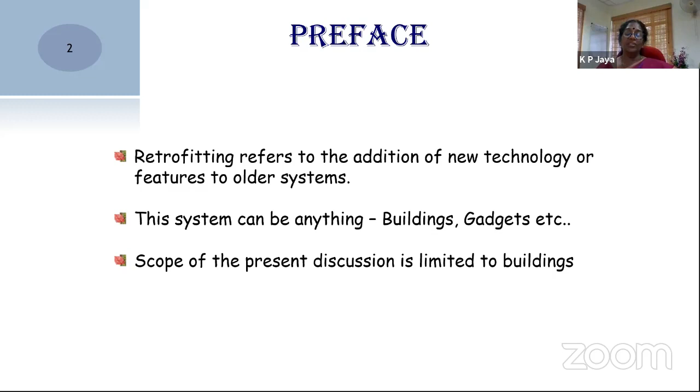Like what we are experiencing now, the corona effect. As they say, any time will pass by, so this also will pass by. We will look forward with a positive attitude.

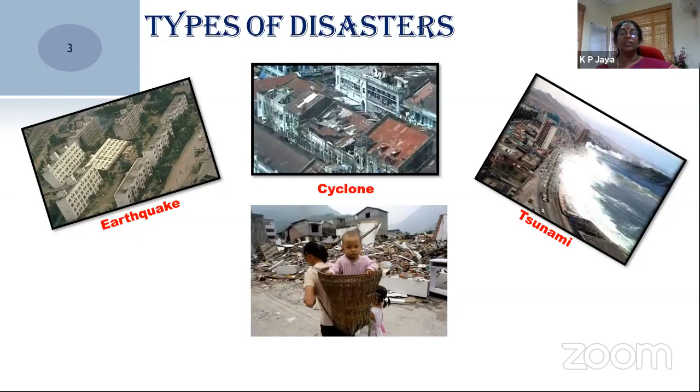This is the effect of earthquake. What is the after effect of earthquake? We will be left with damaged structures and some debris, as seen in the last slide. What are the general lessons learned from past disasters?

I'm focusing on earthquake, which is my focus area. You can look into these pictures. This is a very old picture taken from our Bhuj earthquake, which happened in 2001. That is the heaviest or most damaging earthquake we have experienced.

This is what is called the soft story effect. You can see there was one floor here - an open ground story having less stiffness, which led to the failure of this particular structure by being a soft story. This is a ground floor that is sitting on the ground - the basic fundamental philosophy of damage in structures with less stiffness at the ground story. It will act as an inverted pendulum, where the columns are unable to withstand the load coming from the top. So this is one type of damage.

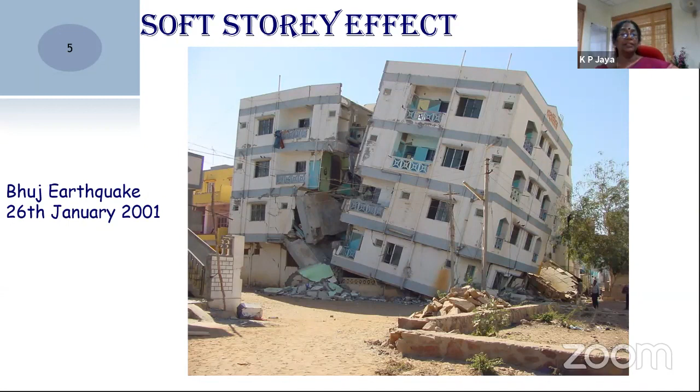This picture is taken from the 2001 Bhuj earthquake. Until that earthquake, we Indians were least bothered about designing structures for lateral loading. After that, people started thinking a lot, and they came out with proper solutions for building structures as earthquake resistant. Now look at the second figure.

This is again the soft story effect. You can see here the discontinuity of shear wall - this shear wall has been curtailed at the roof of the ground floor, and this is the transition girder. The shear wall is resting on the transition girder, and in turn the transition girder has been supported on the column.

So what is the end of this philosophy? The combined stiffness offered by these two columns is lesser than the stiffness offered by the shear walls. Hence the columns are getting damaged. You can see here the concrete has spalled off and the reinforcement is exposed. Finally, the structure has failed. If the column fails, once and for all, the structure will get failed.

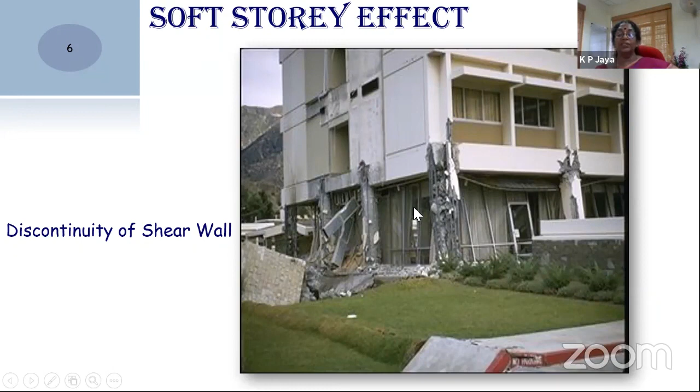This is also one type of soft story failure. You can see here irregularity in stiffness - this is a short column effect, generally called a soft story. What is happening here: this is a one-story column.

Unfortunately, somebody has filled in half the height of the column with infilled brick masonry. So this laterally unsupported column becomes a short column, and the shear forces coming at the top and bottom of this short column become enormously high, leading to its failure. So this is a soft story, which is a subsequent effect of the short column effect.

Finally, what happens after all these disasters is that the column gets failed. This is the top of the column and this is the bottom of the column. The reason for this column failure is generally the accumulation of shear, as well as bending cracks developed at the top and bottom of the columns.

Here you can see the vertical longitudinal reinforcement has buckled and the stirrups have opened up. We have to go about with the total supporting system of the column supports, like confining of column reinforcement and concrete, and all those strategies have to be developed.

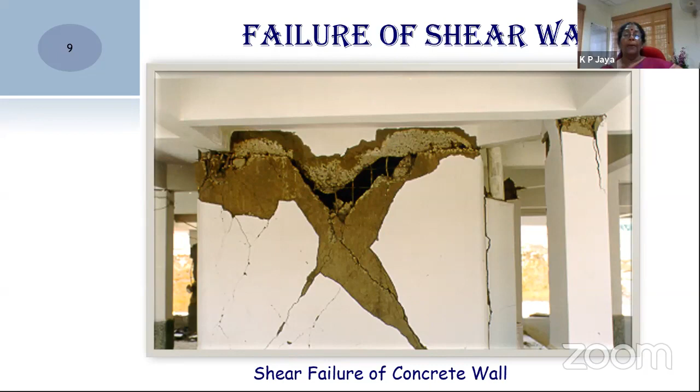Next slides tell you about what is the pounding effect. Pounding means hitting each other. This happens only because the seismic gap between structures is very limited. So there is a particular clause in IS 1893 that we have to provide sufficient seismic gap between buildings to accommodate the deflection during lateral loading.

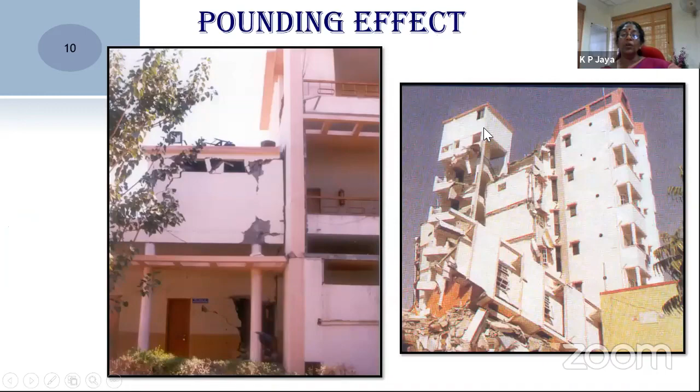Here this picture shows the effect of improper connection between structural elements. You can see here, this is nothing but a shear core, which is the lift core in the building. The lift core supported the diaphragm. At the end of the earthquake, all the supporting elements, diaphragms supported by the shear wall, have fallen down, and only, like our spinal cord, the shear core or shear wall is standing.

So what is the reason for it? The improper connection between the shear wall and the diaphragm which gets connected with the shear wall. This picture introduced some fire into my mind, which led me to give this as a research topic to one of my research scholars, and she has come out with a very proper detailing between the shear wall and diaphragm.

Okay, next is the improper connection between precast structures. You can see here, this is the precast plank, this is the precast beam, and here you can see the precast column, and on this side and this side, the precast wall panel also. During the earthquake, what will happen? This column may deflect towards this side, and this column may deflect towards that side, which leads to opening up of the top surface of the structural elements.

So these planks will lose the supporting base from this portion and will fall down. Just look at the structural elements, the precast elements - all elements are very strong and intact without any failure. But what has failed? The connection has failed. At the end of the day, the structure has failed. So we need to give proper connection detailing between precast structures too.

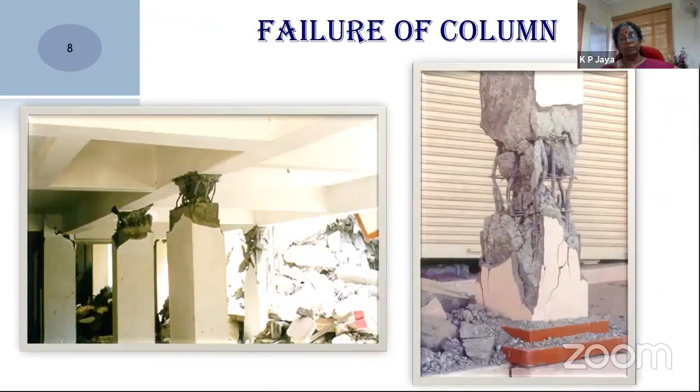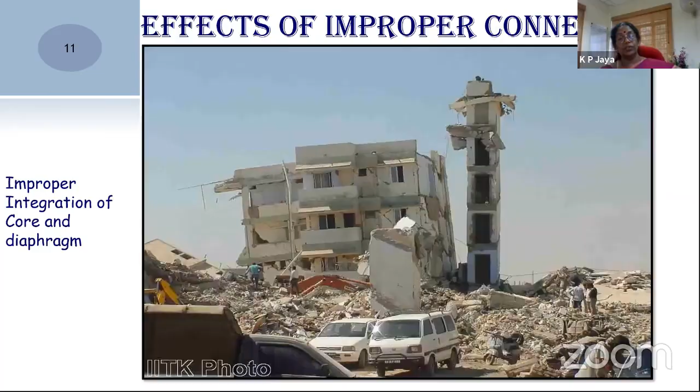So what is the remedial measure? I have discussed the failure patterns during disaster, especially lateral loading, either earthquake or wind. And these are the different types of failure which will be experienced by the system. And what are the remedial measures to arrest or avoid such failures?

For existing structures, we can go with retrofitting. If the structure is experiencing a very limited level of damage, which is serviceable even after the earthquake, we can go with retrofitting. In case of new construction, we can go with three types of strategies: proper detailing, proper planning, and selection of appropriate materials.

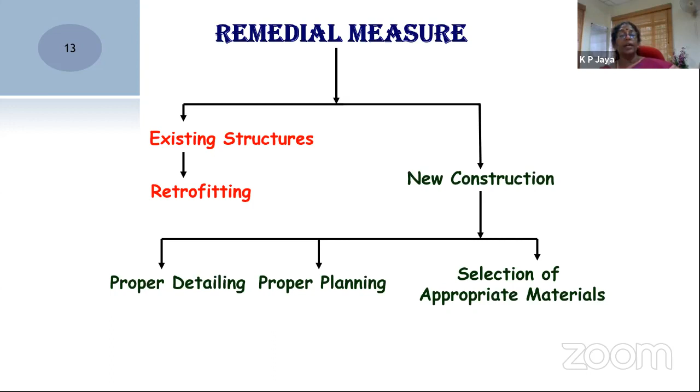So today's lecture is focusing on this part - how we can avoid failure, or handle failure of structures experiencing a very limited level of damage which can be retrofitted back and put into use after the earthquake.

So, phases of the retrofit program. These slides show what phases have to be accommodated in retrofitting. The first thing is vulnerability evaluation - meaning what is the level of damage possibility for a structure. This can be evaluated by considering the structural vulnerabilities of the overall system, the seismic hazard prescribed for that particular site, and socio-economic consequences. These three items will decide the vulnerability of that particular structure in the area under consideration.

Now look into this - the next step is the evaluation of the existing system. System means system capacity. We have to evaluate what is the overall capacity of the global system and what is the demand, the seismic demand.

If an earthquake happens after 10 years, what will be the force exerted on the structure which is retrofitted? That is the seismic demand. There should be a proper ratio between demand and capacity—demand should be much lesser than capacity. That ratio matters a very high importance in the system selection and design of retrofit measures.

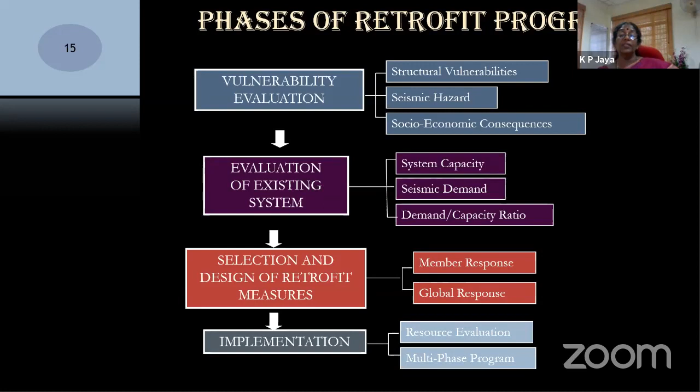This is the overall phase of the retrofitting program. First is vulnerability evaluation, evaluation of the existing system, and define the demand capacity ratio. Based on the demand capacity, we should choose the design retrofitting measures to adopt, and choose the appropriate executing agency.

First is seismic vulnerability evaluation. We should evaluate the site-specific hazard, based on local soil condition and soil response and failure. You can see here, this is the source and this is the path—this is very much concerned with local soil conditions.

If the soil has the nature of enhancing the tremors developed at the focus area, the excitation reaching the base of the structure will be high. The soil property can either amplify or attenuate the effect of the earthquake transmitted to the soil and hitting the structure. So local soil conditions have an important role in deciding the excitation experienced by the building, as well as soil response and failure.

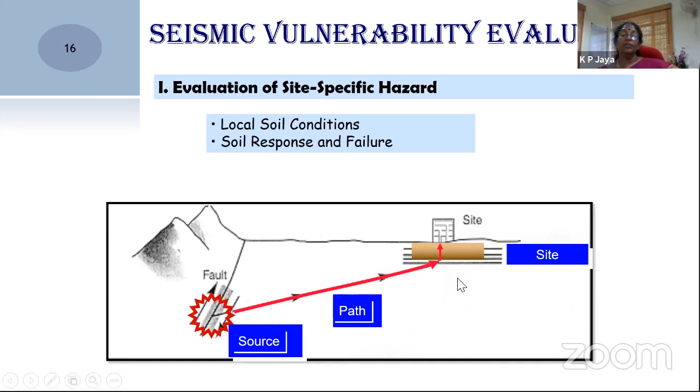If it is a very hilly area, the soil can experience sliding—so there are a lot of issues. Due to soil conditions, structures can experience this type of bulging of soil, leading to failure of the structure. This is the evaluation of site-specific hazard—soil condition plays a very important role in developing these types of damages to the structure.

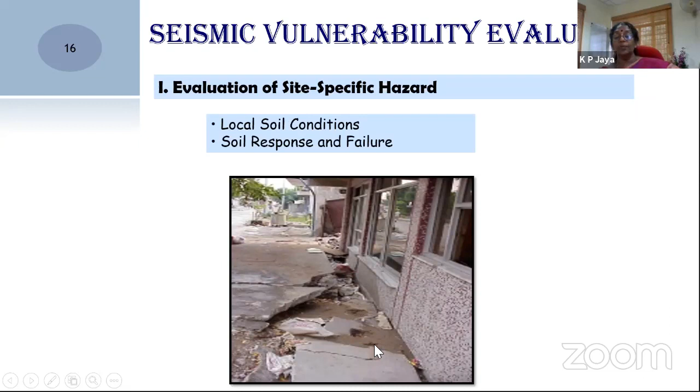Now come to the evaluation of structural vulnerability. We should evaluate what is the capacity and what will be the demand on the structure. Based on that, we have to identify the appropriate geometry—it has to be symmetrical in plan as well as verticality.

When evaluating structural stability or vulnerability, the date of design and construction is very important. The residual strength of the structure has to be evaluated to arrive at the demand capacity ratio. This is the global vulnerability evaluation strategy.

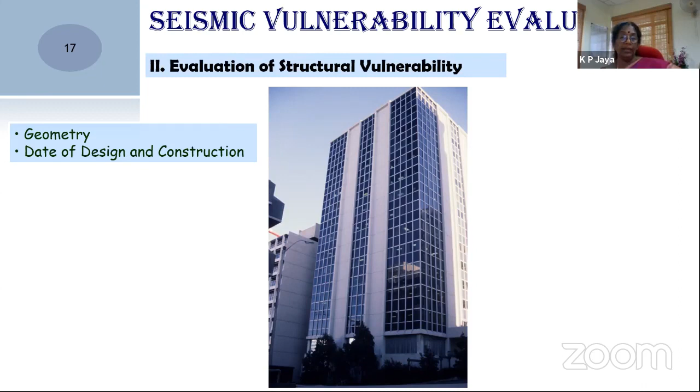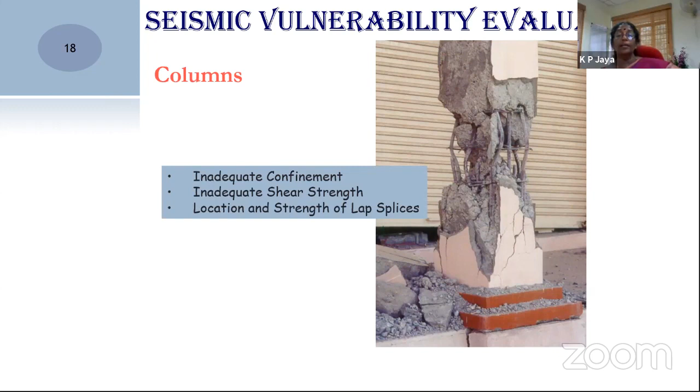When you come to the local or elemental level, what are the vulnerability evaluations? We have to concentrate on elements like columns and beams. First, this column—just look at this picture. This damage is due to inadequate confinement, inadequate shear strength, and location and strength of lap splices. These are the reasons for the failure of this particular column.

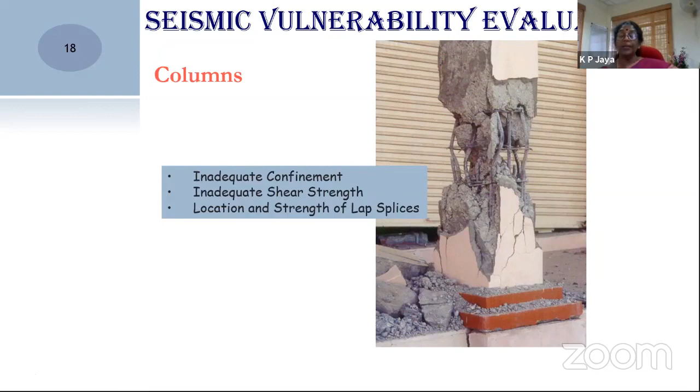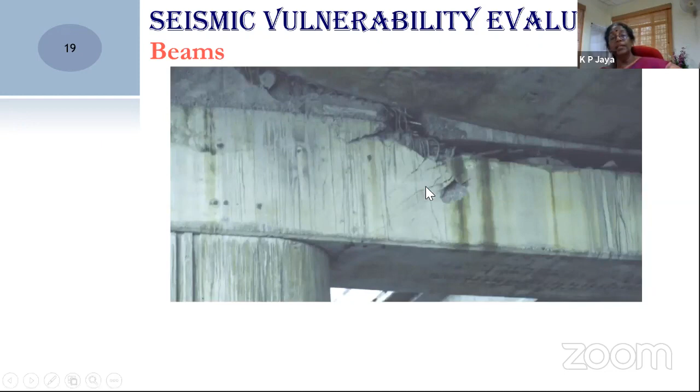To avoid this type of failure, we have to adopt appropriate strategies while doing the retrofitting. Next comes the beam—just look at this failed beam. It has failed at the top surfaces, and you can see shear cracks in the beam surfaces.

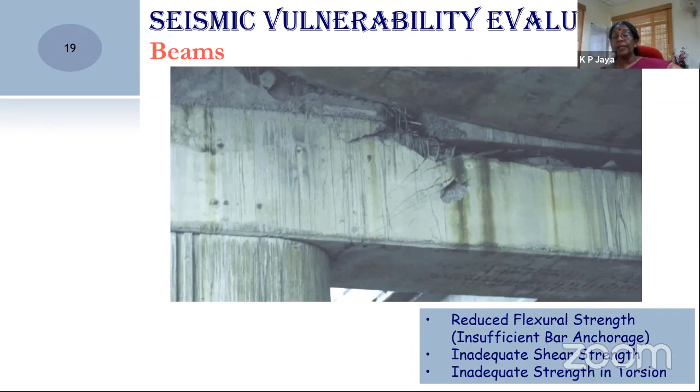This may be due to reduced flexural strength, insufficient bar anchorage, or inadequate shear strength, leading to the development of shear cracks, plus inadequate strength in torsion—it is subjected to torsional warping also. So flexural, shear, and torsion together caused the failure of this beam, and we have to identify proper retrofitting strategy to regain its strength.

Then look at the joints—joints are very critical, crucial locations. This is the beam-column joint, with the column and the beam. Due to shear crack development at the joint region, the joint has experienced spalling of concrete.

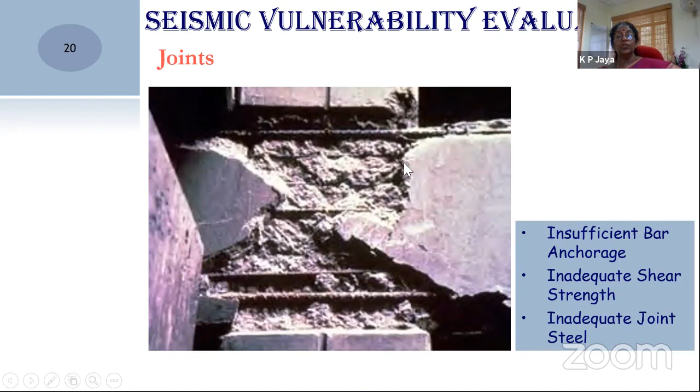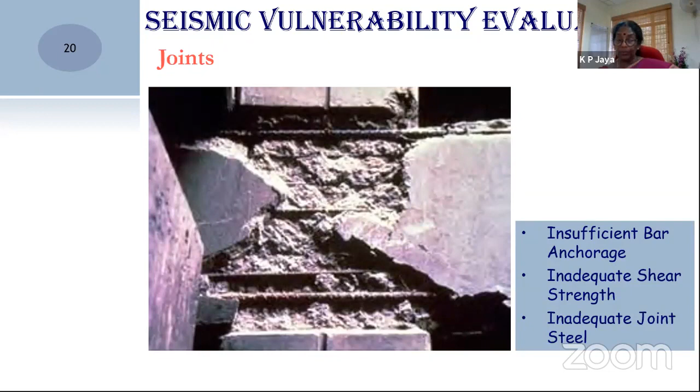The shear reinforcement has been exposed, and there is a possibility for retrofitting this particular joint. The question is what is the reason for failure of this joint region. When retrofitting the joint, we should look at the reasons for failure, and attack them from the root cause before doing the retrofitting.

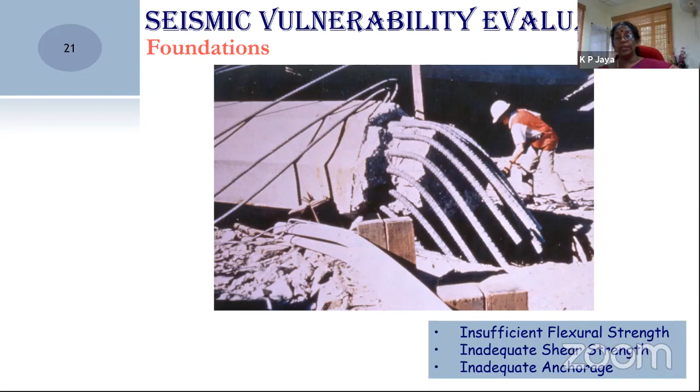Now comes the foundation. Look at this, the reinforcement has been totally taken off. There is no proper anchorage or bond contact between the reinforcement and the foundation. It's totally toppled off. This type of failure is due to insufficient flexural strength, inadequate shear strength, and inadequate anchorage. These failures lead to the strategy of how we can find a proper approach to retrofit the system.

You have columns with dimensions 300 by 300 or similar. We replace some part of the concrete and add new concrete of higher strength. That is what is called replacement of concrete members. Or sometimes we replace a column with a shear wall - that also comes under this category.

Next is addition of concrete sections. We can do either an overlaying method or jacketing. In construction, we generally call this RC jacketing, steel jacketing, or FRP jacketing, depending on whatever material is used. Accordingly, we name the method of retrofitting.

The addition of members - vertical girder addition method. If you feel a particular floor has lesser stiffness, we can add additional columns. That is the vertical girder addition method.

If you need to add support points - in case a beam's span is too high, you can add a column in between. But accordingly, we have to do some retrofitting or reinforcement detailing into the beam where you are adding the supporting points. That is what is called the support method.

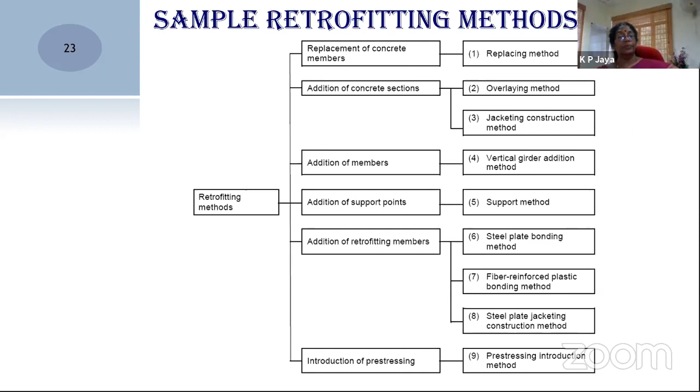So how can we approach the retrofitting method? There are two basic strategies - global method and local method. Global has two main categories: conventional method and non-conventional method.

The conventional method, as I told you in the previous slide, involves adding additional shear wall or additional infill. These will add additional stiffness to the floor. This additional infill methodology has been adopted in some buildings in the Bhuj area after the earthquake, and imparting additional infill enhances the stiffness in that particular floor.

Adding bracing also imparts additional stiffness to the system, and sometimes this bracing can act like a damping system, giving us something capable of dissipating the energy hitting the structure. And adding wing walls will also give additional stiffness to the system.

Wall thickening and mass reduction is a very innovative method. Mass reduction means we reduce the mass overlaid on top of the vertical elements, thereby safeguarding the system. This is because external force - either wind loading or earthquake loading - is directly proportional to mass and acceleration. If we reduce the mass, we in turn reduce the force on the system.

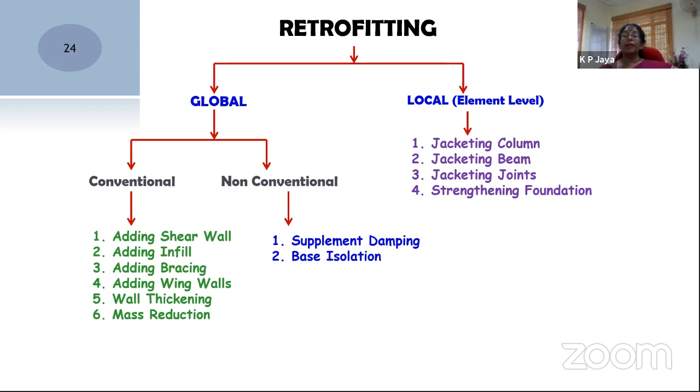Local or element level retrofitting strategy can be adopted, like jacketing column, jacketing beam, jacketing joints, and strengthening the foundations. This is the difference between the global and the local system. In the global system, we are attacking the overall system, enhancing the performance of the overall system. In local retrofitting, we are enhancing the performance of the individual elements.

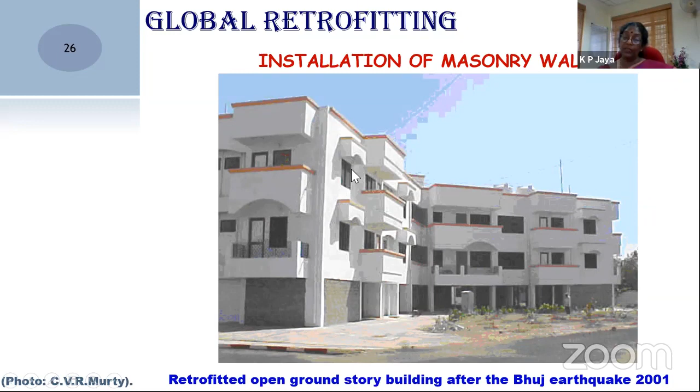I have taken this courtesy of Professor C.V.R. Murty, who is a pioneer in the area of earthquake engineering. These are the strategies suggested by the earthquake community to enhance the strength of structures with the introduction of shear walls.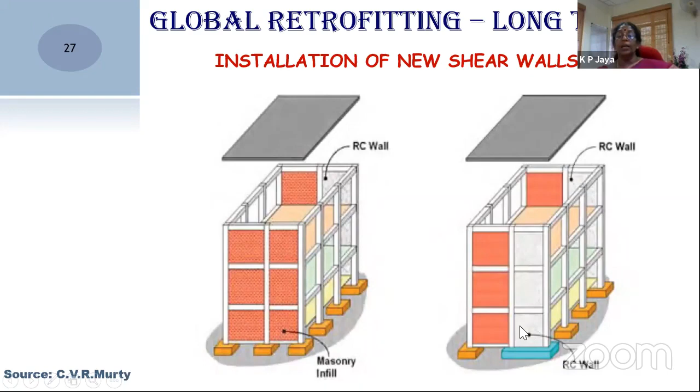Now, while introducing the shear wall, this has to be properly stitched. This is the boundary element, which would have been a column at the extreme end. As seen in the previous slide, one column is here, another column is here. The reinforcements from the shear walls need to be stitched with these columns on either side as well as the beam on top, as shown in this slide.

You can see here, this is a new shear wall, this is the existing frame with a beam and a column. This introduced shear wall has to be linked with the existing element through dowels, which have to be passed through the beams. For that, we need to drill holes through the beam without disturbing the existing longitudinal reinforcement of the beams. These are the dowel bars introduced to connect the existing frame to the newly introduced shear wall.

This is very, very important. Dowels through the existing structure, whether through the columns or through the beams, have to be extended full-fledged. This is the earlier frame, into which these beams have to be drilled to introduce the shear wall. In addition to all these things, the shear wall will have its own reinforcement.

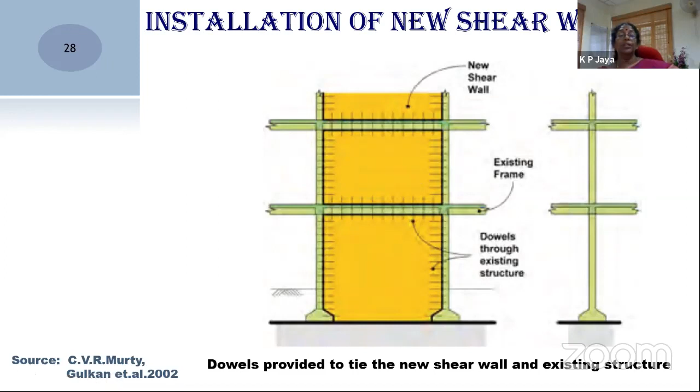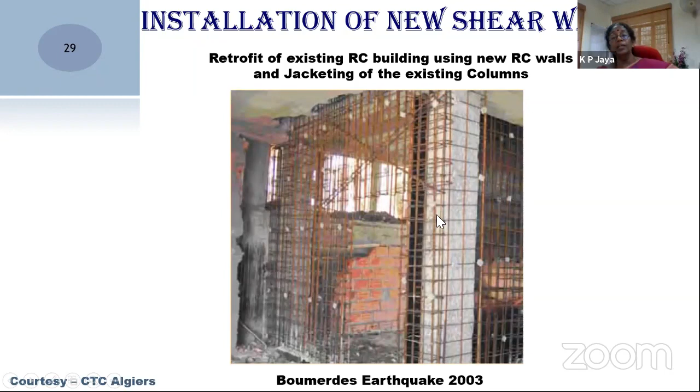You can see here the reinforcement passing through these beams as well as the slabs. The shear wall reinforcement has been drilled through the slab area and protruded outwards. And in the intermediate area, this beam area will be introduced with additional shear dowel bars.

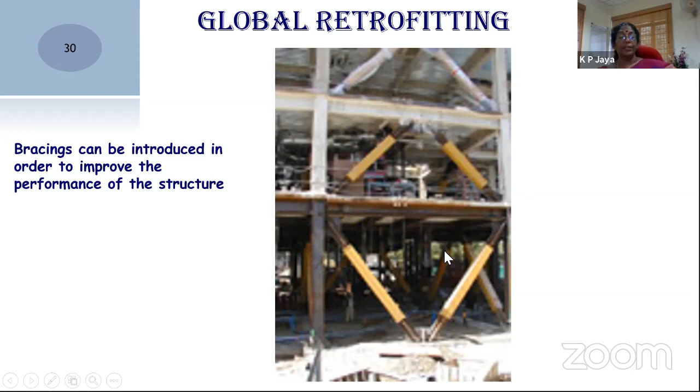This is very much available in the market. You bring it and properly connect it with the vertical element and the horizontal element. Proper anchorage has to be provided. There are different types of braces - you can see here, this is concentric braces, and another is eccentric braces, K braces. These are varieties of braces we will be able to introduce into the system.

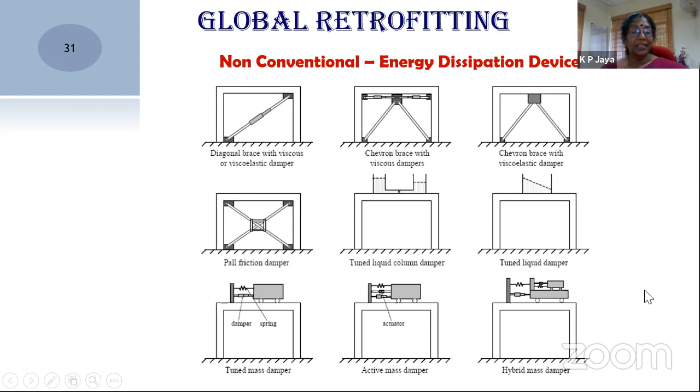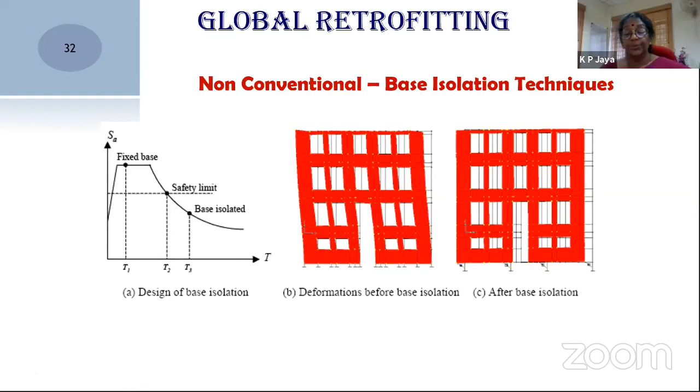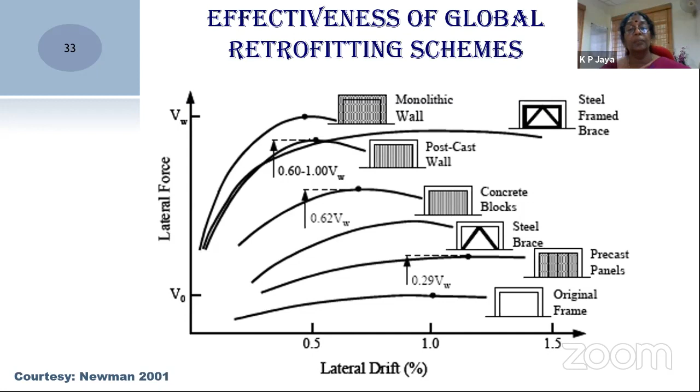Hema, are you there? Ma'am, I'm here, ma'am. Okay, so how much more time will you give me? Ma'am, you can take another 20 minutes, ma'am. Okay, fine. It's audible now, Hema? Yes, ma'am, it's audible, ma'am. Definitely, it is quite difficult to take without seeing the audience.

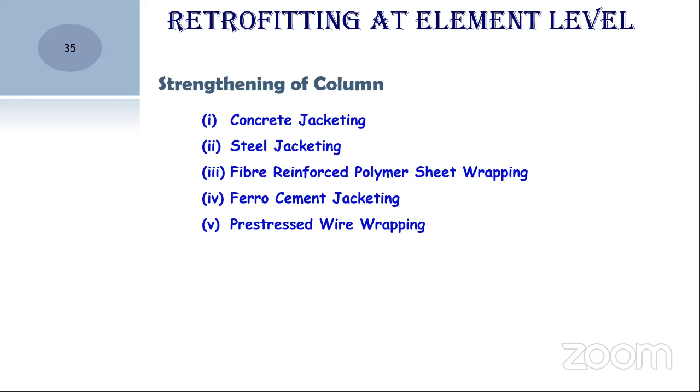Okay, so strengthening of column either by concrete jacketing or steel jacketing, fiber reinforced polymer sheet wrapping - nothing but FRP wrapping, and ferrocement jacketing, pre-stressed wire wrapping. These are the various methods adopted for strengthening the columns.

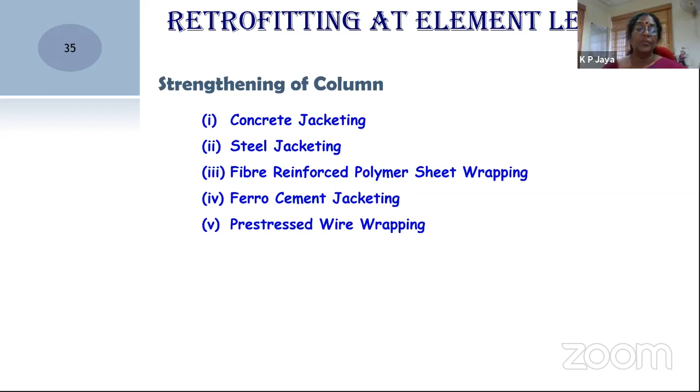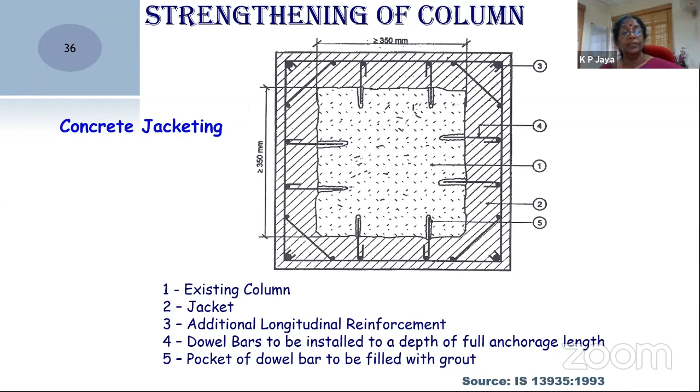Here we have to think about this actual picture where the retrofitting strategy is shown. This is the existing column, and this is the jacketed concrete. Here there are a few precautions we have to take.

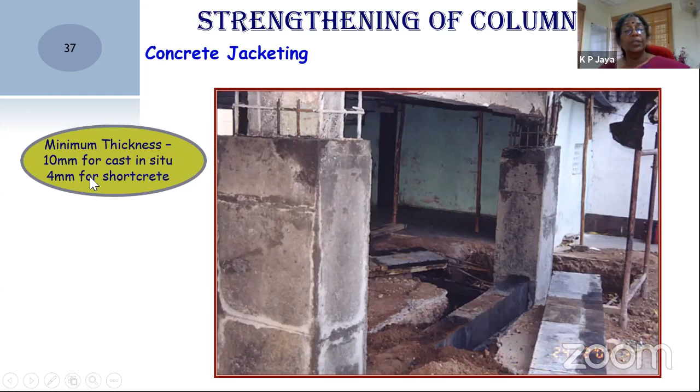Minimum thickness should be 10 mm for cast-in-situ concrete and 4 mm for shotcrete concrete. And adequate shear keys have to be provided to introduce proper integrity and compatibility between the existing column and the jacketed concrete.

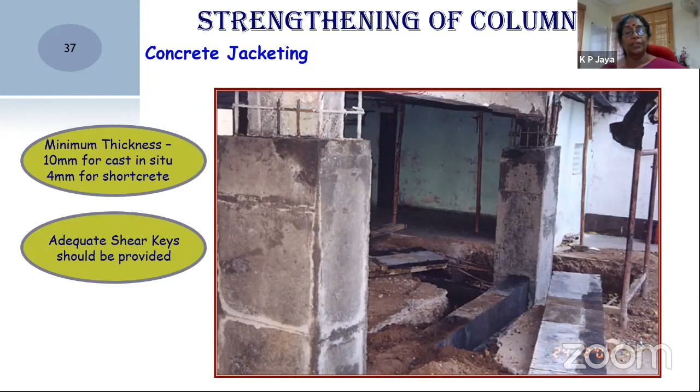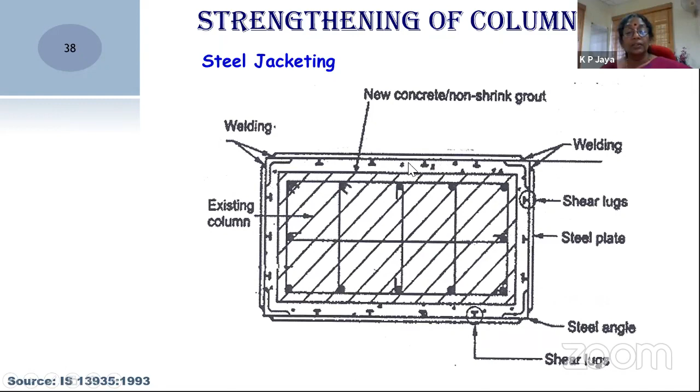This is nothing but steel jacketing - similar to the previous one. This is the existing column, and we can introduce jacketing with steel sheets, which has to be connected. Here you can see the steel angle, which is imparted to the concrete area, and these are the shear lugs connecting the concrete and the connecting element with the existing column.

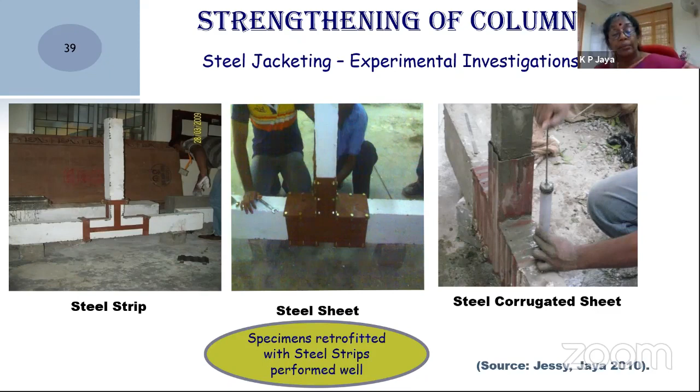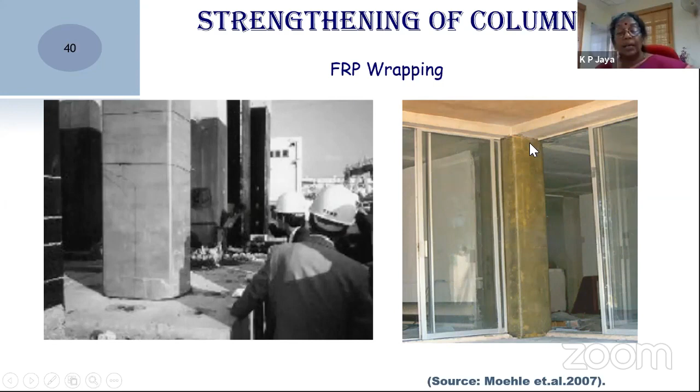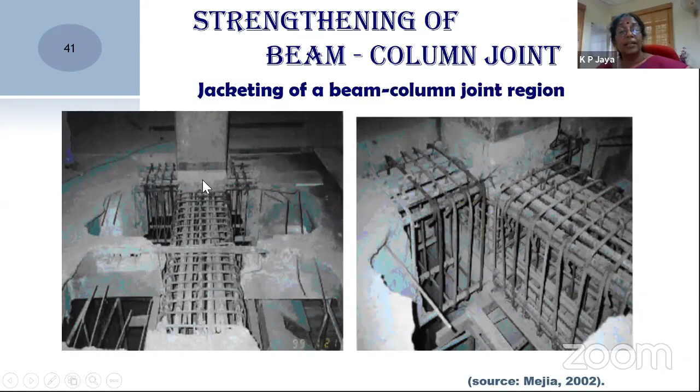This is jacketing of the beam-column joint, RC jacketing. The beam-column joint is exposed, additional wrapping reinforcement has been provided, and later it has been concreted.

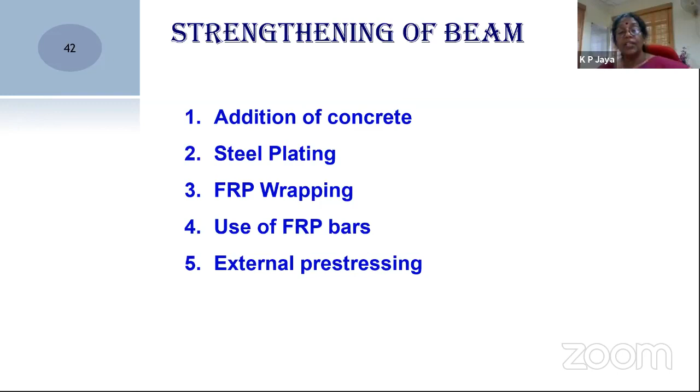Now come to strengthening of the beams - again addition of concrete, steel plating, FRP and FRP bars. These FRP bars can be introduced externally and concreted with proper concrete of appropriate strength, and external pre-stressing also can be imparted for strengthening the beam.

These pictures are again taken from IS 13935/1993. You can see here, while retrofitting the beams, you can choose any one of these strategies.

If it is rounded about throughout the beam, you have to run this reinforcement, whatever be the confining reinforcement or stirrups, through the existing slab and take it out like this. Here the stirrups have to be taken through the beam, and this is the jacketed concrete.

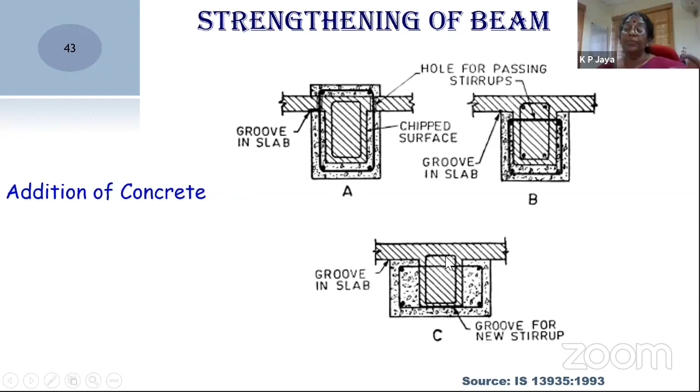But if you need a wider beam, you can go with this type, but there should be a limit for the additional thickness of this added beam jacket. We have to take all precautions prescribed by IS 13935, with respect to the strength of the concrete and strength of the steel adopted. There should not be a big disparity between the steel of the existing element and what you are adding to the system.

This is the picture for FRP wrapping. You can see there is a necessity to clear the surface and wrap the FRP, and this is the bonding agent. The main problem with FRP wrapping is that it is subject to delamination of the wrapped system.

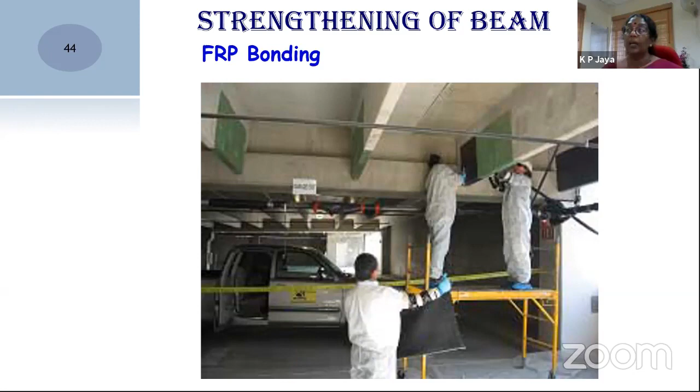It is generally prescribed to use it with rounded edge elements. You can see the sharp edge here. Once subjected to some level of loading, this sharp area with higher stress concentration will lead to delamination of the jacketed FRP. So we need to be more careful in that area, and the surface to which the FRP has to be bonded must be appropriately managed.

This is a structure which has had all these retrofitting strategies applied with FRP bonding. The building is from Panorama Condominiums, Las Vegas, Nevada. You can look at this beautiful structure which has been retrofitted after an earthquake event with FRP bonding.

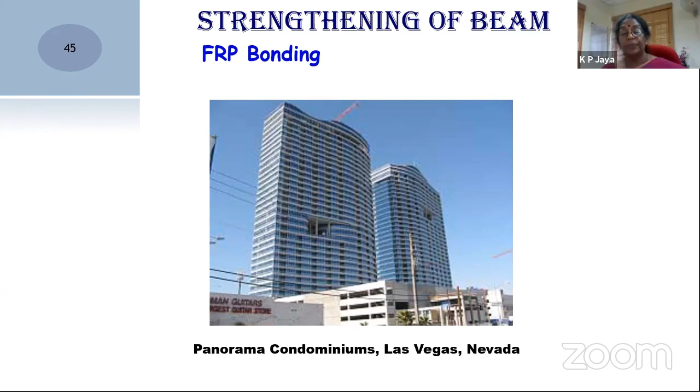One case study I have taken from Hi Tech Solutions, Chennai, they have implemented steel jacketing for, there are 2-3 case studies there. This case study is with respect to steel jacketing, I'll just show what exactly they have done at the site. This is the building where they have imparted this steel jacketing philosophy.

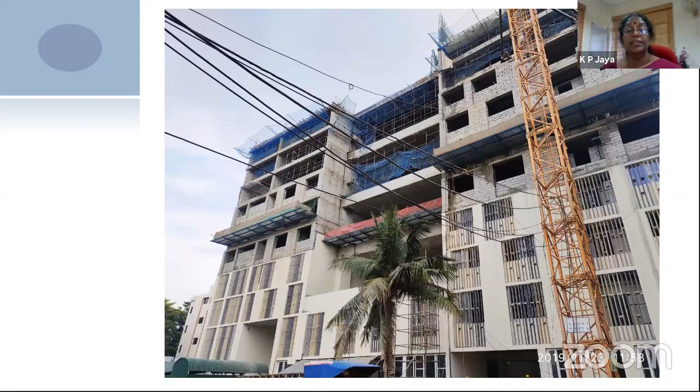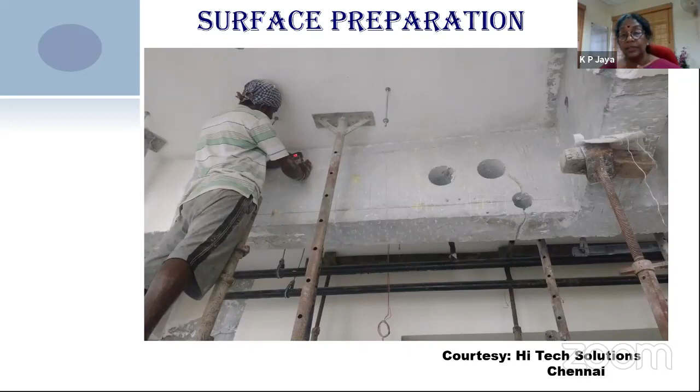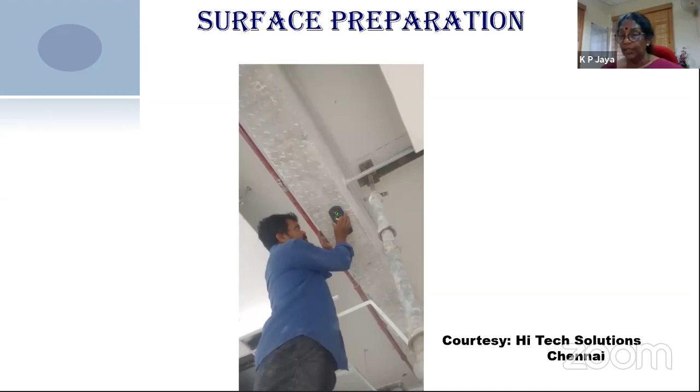After that, they are preparing the steel sheet, with dimensioning, surface cleaning, and all those things. These holes are to pass the AC duct or whatever MEP lines have to be passed through the beams. Accordingly, they will put the hole in the steel sheet also. They are preparing the sheet.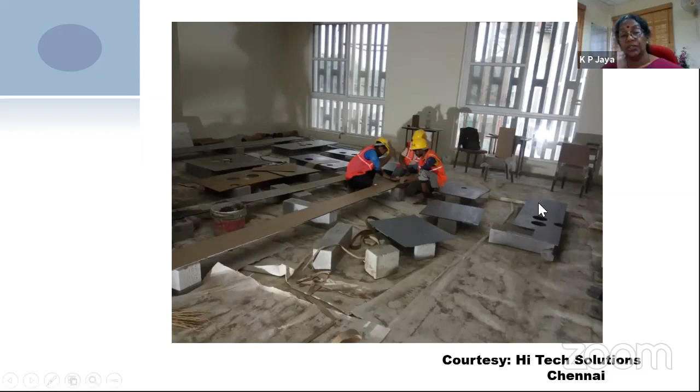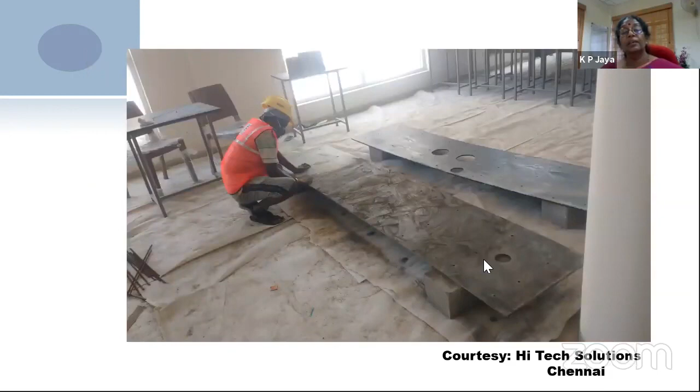This is the cutting, wherever they need some additional cutting, you can see they have marked the holes and they are doing this cutting process. Again, it is preparation of the sheet for fixing in the beam. So for surface preparation, they are doing all this so it should not get corroded later.

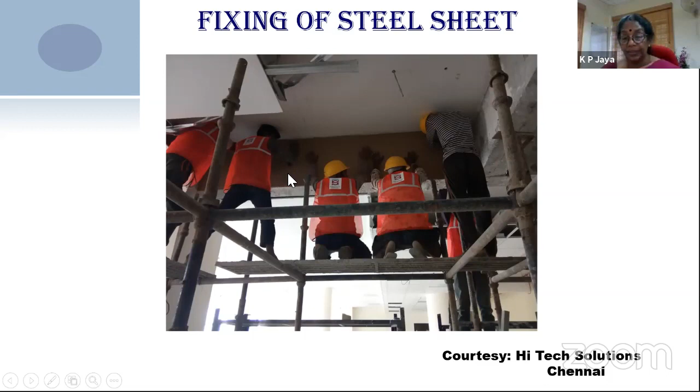So they are treating the surface of the steel sheet and fixing it on the beam. You can see this is the beam which is running, you can see the bottom of the beam, and the surface has been properly treated, and the surface of the steel also has been properly treated and fixed at the face. Here you can see different types of work carried out.

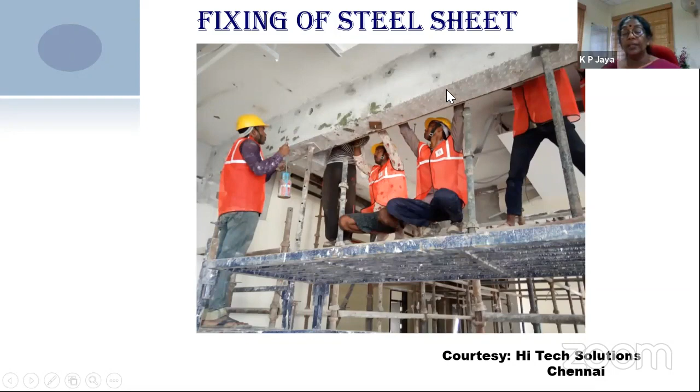This is the surface on which they will put the bonding agent, and they are fixing sufficient shear keys between the steel plate and the existing beam. You can see the process of fixing the steel sheet on the beam, and at the end, this is the retrofitted beam. Here you can see the steel sheets, and on all sides you can see these shear keys, and this is a supporting haunch for the steel sheet at the end. End-to-end connections are ready, so it is a retrofitted beam.

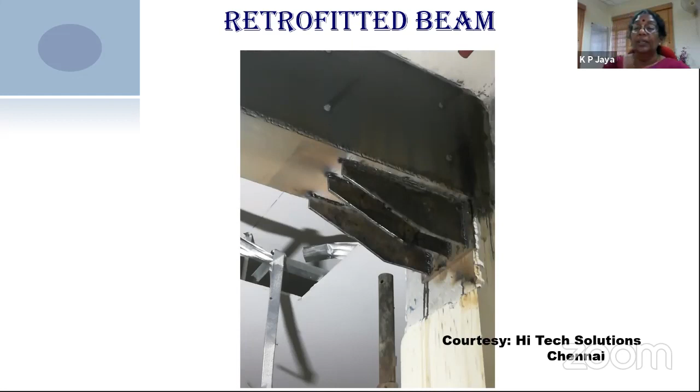I give my gratitude to Hi Tech Solutions who have shared all these slides with me. The next step is FRP wrapping. This is the FRP, and they will prepare the surface of the beam and provide this FRP. You can see these holes have been provided to pass the MEP lines.

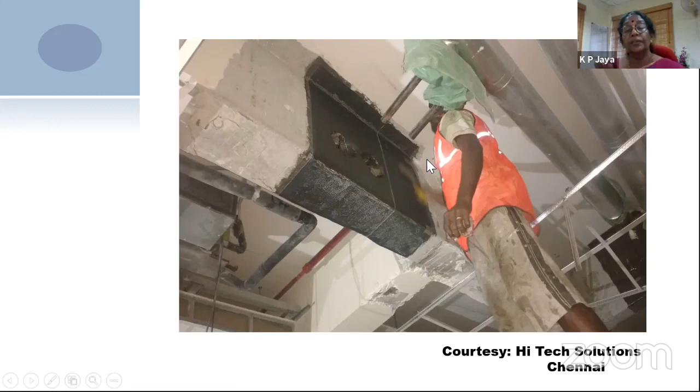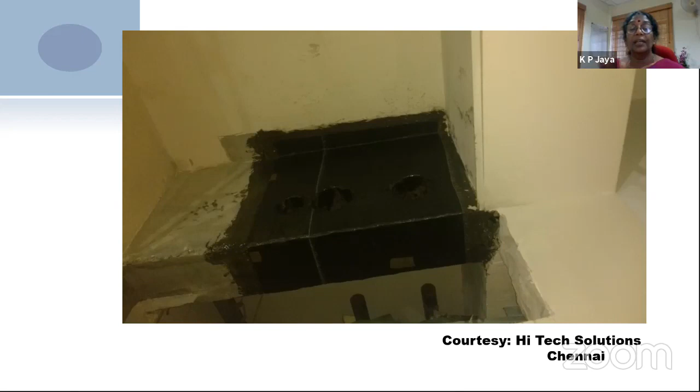See, this is the final look of that. After this, they will do all the painting work on top of this. This is the FRP wrapped retrofitted beam element. The fixing of the FRP is very important. It should not leave any air gap between the surface and the FRP; otherwise, there is no point in doing this.

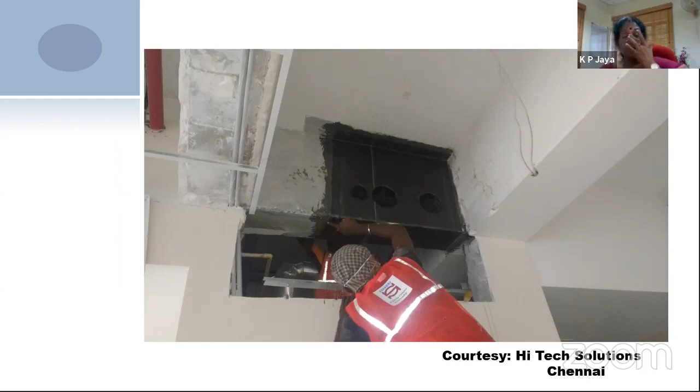This is a very crucial and critical retrofitting strategy. RC jacketing is a very straightforward method. Generally, the failure of the retrofitted element will be much less with RC jacketing compared to FRP wrapping. So you can see here, this is the final look of that.

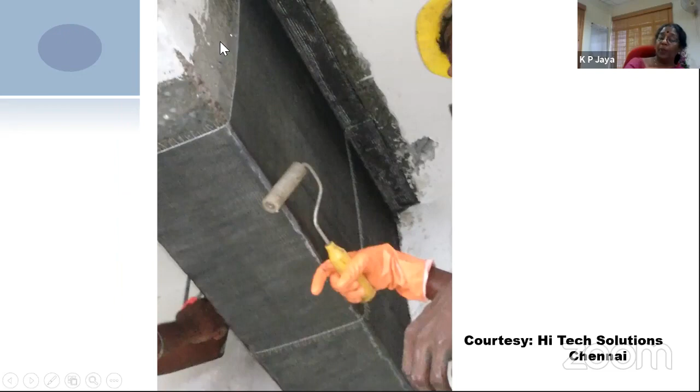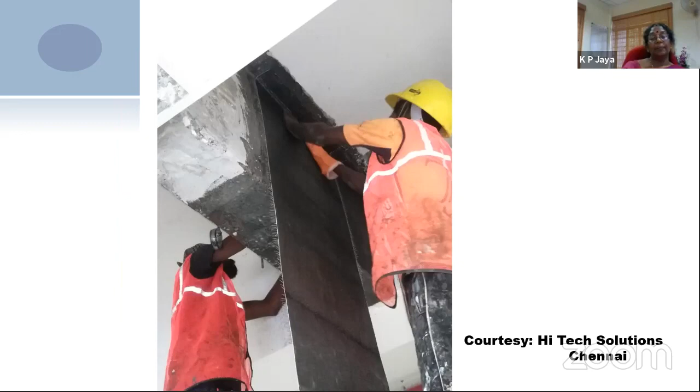You can see here all these fibers are protruded out of this. This has to be properly treated and proper adhesives has to be adopted while doing this method. This is the sequential process of FRP wrapping, and this is just like that. I have put up a slide, but I'm not going to discuss more about this.

This is the seismic retrofitting of a freeway structure. This is the original concrete column, this is the grout, and this is the steel casing. The grout is an intermediate element between the original concrete column and the steel casing. This is one methodology adopted for the retrofitting of freeway structures.

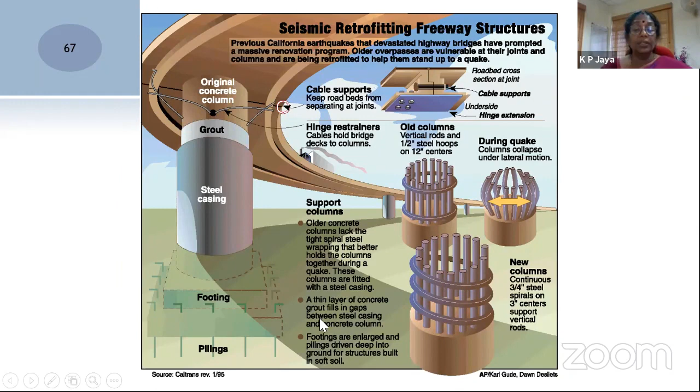This is the bridge structure and retrofitting of the pier elements supporting it.

And what is the final goal of all this retrofitting? It is to ensure an increased lateral strength and stiffness of the building, and to increase the ductility of the building. Also to increase the integral action and continuity of the members in the building. We need compatibility between the systems, and to eliminate or reduce the effect of irregularities. This is very important. Irregularity in the form of vertical stiffness or lateral load resisting system.

We have to find some solution to avoid these types of irregularities and to enhance the redundancy in the lateral load resisting system. Enhanced redundancy means if anything happens to one element, the remaining elements have the capacity to withstand the lateral load, leading to the safety of the system. So, to enhance redundancy in the lateral load resisting system and to ensure adequate stability against overturning and sliding - this is the final goal of retrofitting any system.

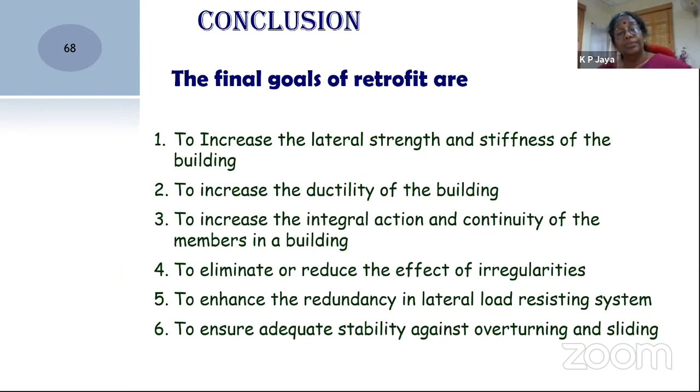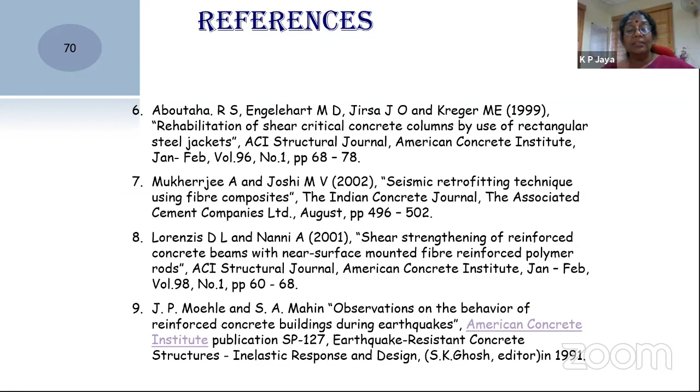And these are the references: ACI, FEMA, IS codes, Goel, and Aboutaha, Mukherjee. They have done a lot of work in this area. Thank you so much.